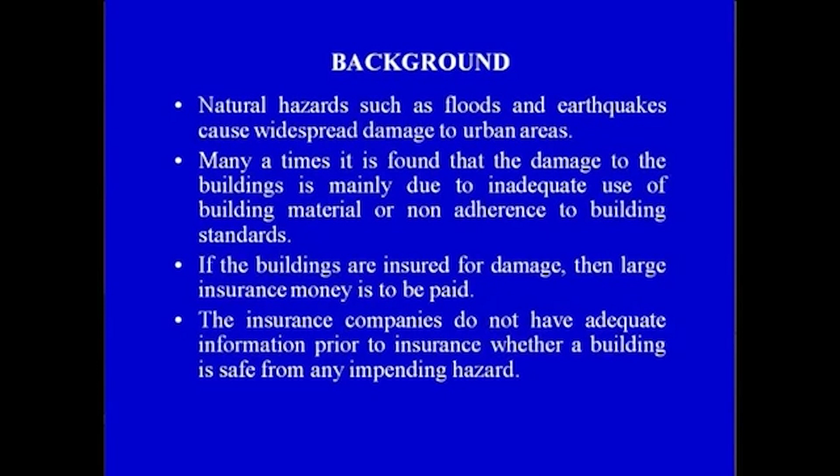The insurance companies do not have adequate information prior to insurance whether a building is safe from any impending hazard. To acquire such information regarding individual buildings through ground based methods is going to be time consuming and costly. So, this study tries to highlight the usage of advanced surveying techniques to generate a building attribute database, so that the same can be used for assessing the risk associated with each building as and when a natural hazard occurs.

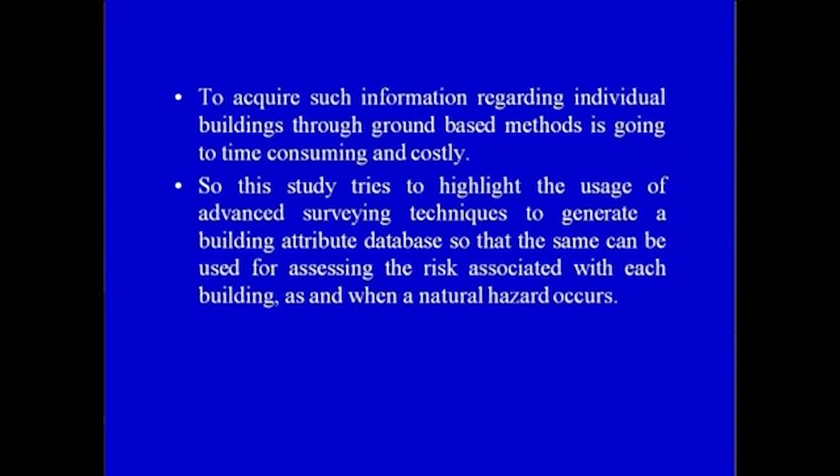So, the objective of this study is to generate the information of some of the buildings characteristics using high resolution satellite data like QuickBird and benchmarking with respect to ground based data. The study also includes generation of knowledge based rules for creating a building inventory GIS database.

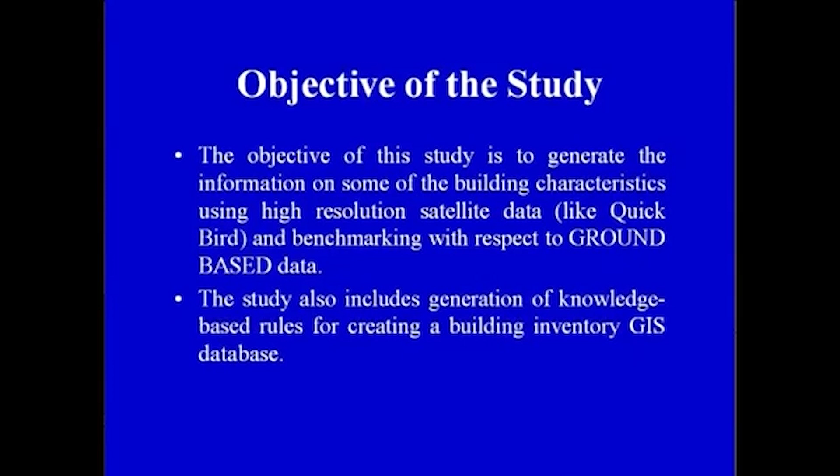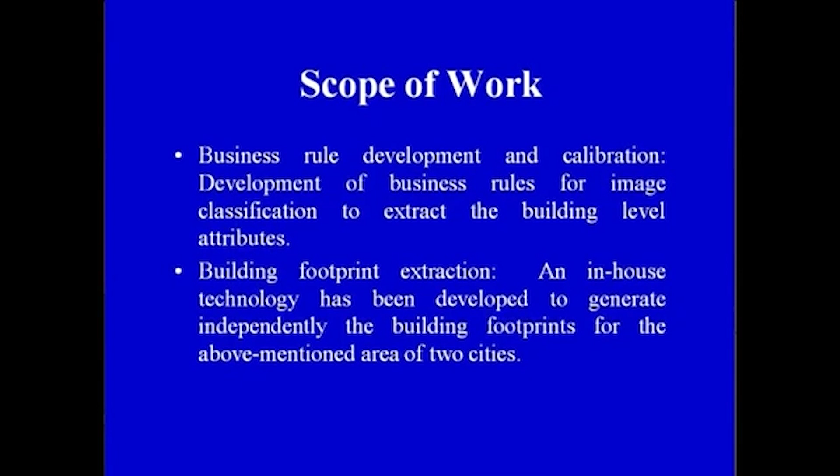The scope of the work can be defined as follows. First, business rule development and calibration: the development of business rules for image classification to extract the building level attributes. Next is building footprint extraction. An in-house technology has been developed to generate independently the building footprints for the above mentioned areas of the two cities for which the study has been implemented.

Building inventory generation. Along with building footprints, the following attributes need to be extracted, such as building height, number of stories, complete square footage, footprint square footage, construction class, occupancy type, exterior wall material, building shape, roof geometry and roof material. And finally, validation with field survey data or any secondary data, with the help of field survey data or available field photographs of some of the sample buildings.

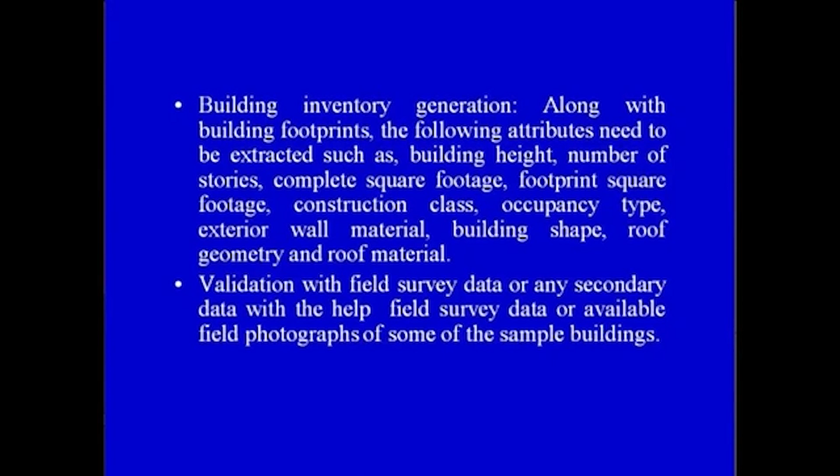There are three study areas which have been selected, namely Santa Ana, Costa Mesa in Orange County, California, and Naples in Florida in the United States of America. One site each in Santa Ana and Costa Mesa and two sites in Naples, covering an area of 1 square kilometer each, have been selected for this study.

Well, in these two areas, predominantly urban areas have been selected, so that the impact of the same can be studied, whereas in Santa Ana, areas comprising of high rise buildings have been selected, so that the information for high rise buildings can be extracted.

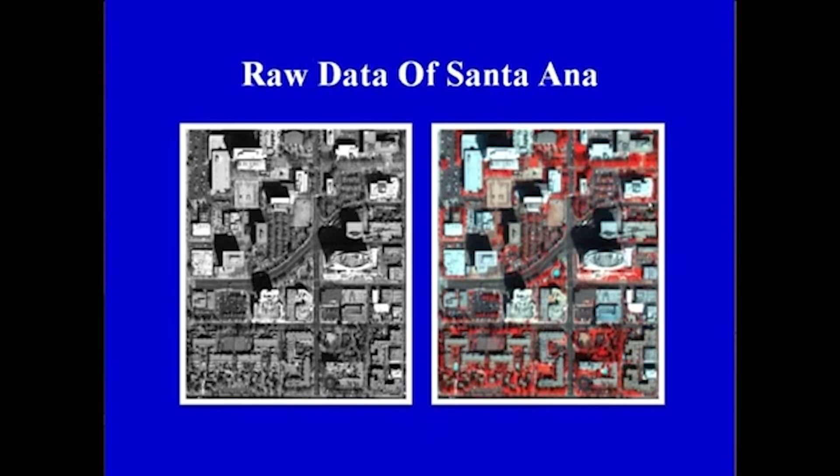Similarly, for Naples area, two sites have been selected. Naples is an area in Florida which is close to the coastal region and is very commonly used by tourists for vacation. So, here there are lot of resorts which we can see, and these resorts may be single story or they could be multiple story buildings. Another area of Naples is the commercial area, which comprises of both residential and commercial areas.

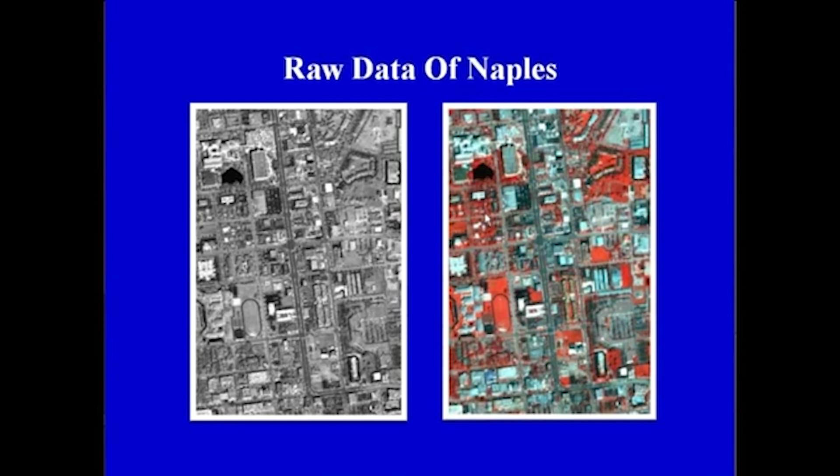So, for the generation of building footprints and its attributes, a semi automated approach has been adopted. Here pan data has been used as a single data set for extracting edges, whereas MSS QuickBird data has been used for classifying the building material. So, now let us look at the methodology which has been adopted for this study. We have two data sets. First is the panchromatic QuickBird data and the other is MSS QuickBird data.

The panchromatic QuickBird data is subjected to different forms of data extraction available through image processing, that is, density slicing and Kirsch filter have been selected to extract the information. After the data has been subjected to these processes, the edges are converted from raster to vector. The vector layers need to be cleaned and built for clarity in the information, and subsequently the data set has to be converted into shapefile before any vector based analysis in a GIS environment can be adopted. Sometimes a manual editing process may be required if the edges of the building are very wide.

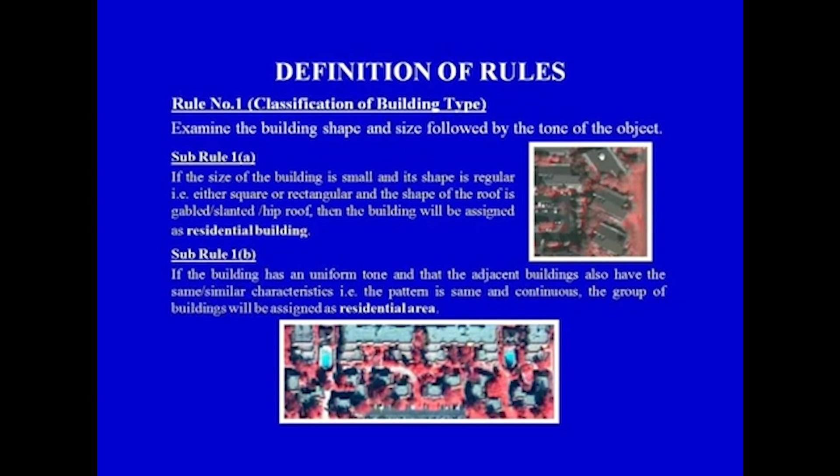Sub rule 1C: examine the nearby objects, that is the shape of the roads, location of parks. If the group of buildings occurs on both sides of the road in a regular manner, the group of buildings will be confirmed to belong to a residential category. Additionally, presence of small parks or lawns within the area will further strengthen the confirmation of the group of buildings as residential areas.

Sub rule 1D: examine the building size and shape, and if the size of the building is large and on the rooftops many utility items such as water storage tanks or air conditioning units appear, then the building may be assigned as a commercial building. It may be an office complex or a hotel or a warehouse.

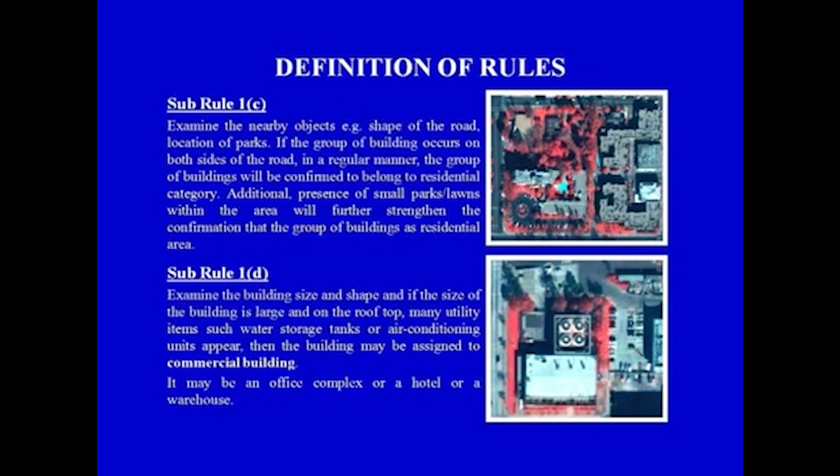Sub rule 1E: if the rooftop is flat and there is presence of underground ramps or open space for parking, having stories greater than 4, the building may be categorized as a hotel or an office building. If the front of the building has lawn space or close to it water pools exist, then the building can be classified as a hotel, or else it is an office complex.

The same can be seen here. In the center we find an elliptical shape object which is nothing but the rooftop area of a particular building, and adjoining on the right hand side, we find that there is a ramp which goes below the ground. This gives us a clear indication that this is a hotel area.

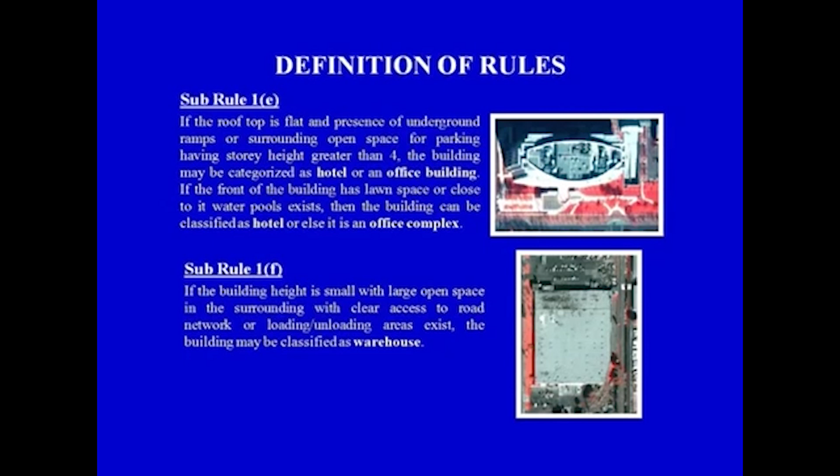Next sub rule is rule 1F: if the building height is small with large open space in the surrounding with clear access to road network or loading and unloading areas exist, the building may be classified as a warehouse. Then rule number 2: classification of rooftop building material.

Spectrally classify the building and based on the signature, tone and texture classify the building material. So, rule 2A for residential areas: if the building roof is gable, hip, gable and/or slanted, and the number of stories is less than 4, the building material used may be aluminum overlaid by tiles.

If the color of the tiles in the FCC of the satellite appears in varying tones of red, then it is earthen tiles. If the color tones in the FCC of the satellite images appear in gray, then it is shingle tiles.

Rule 2b, commercial areas. If the rooftop is flat and the size of the building is large with open spaces for parking or loading/unloading areas, and the color tone of the roof material has shades of gray, then the roof material may be classified as PVC fiber mesh with bitumen covered by concrete tiles for waterproofing. The cutout adjacent shows such an area in the satellite image.

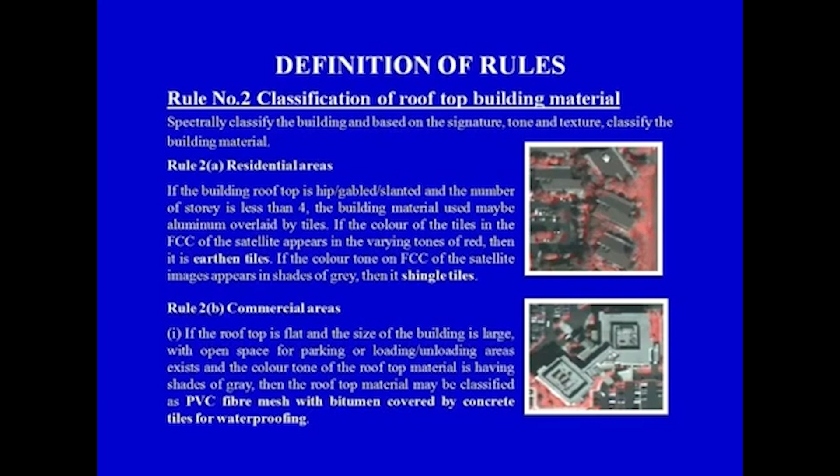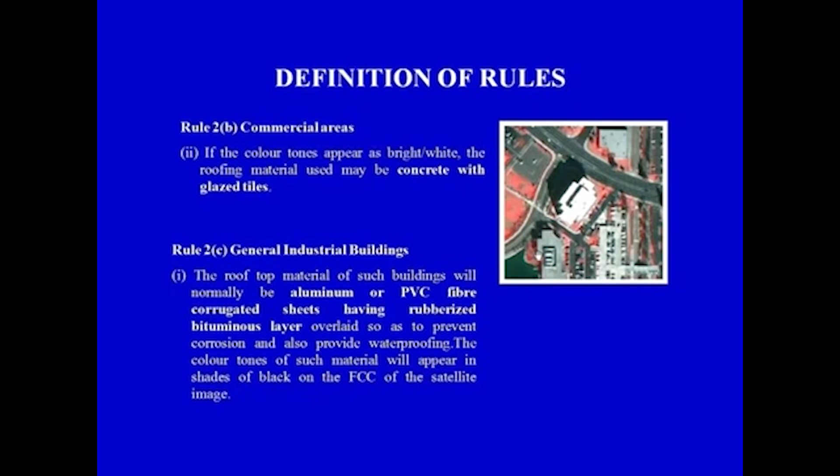Rule number 2b, commercial areas: if the color tones appear bright or white, the roofing material used may be concrete with glazed tile. Similarly, rule 2c is general industrial buildings: the rooftop material of such buildings will normally be aluminum or PVC fiber corrugated sheets having a rubberized bitumen layer overlaid to prevent corrosion and provide waterproofing. The color tones of such materials appear in shades of black on the FCC of the satellite image.

For cladding material, residential buildings will use plywood or gypsum board with a covering of paint/tiles. Warehouses will have precast concrete walls. Hotels and office buildings could have concrete/framed aluminum panels having plywood overlain with concrete or glazed glass.

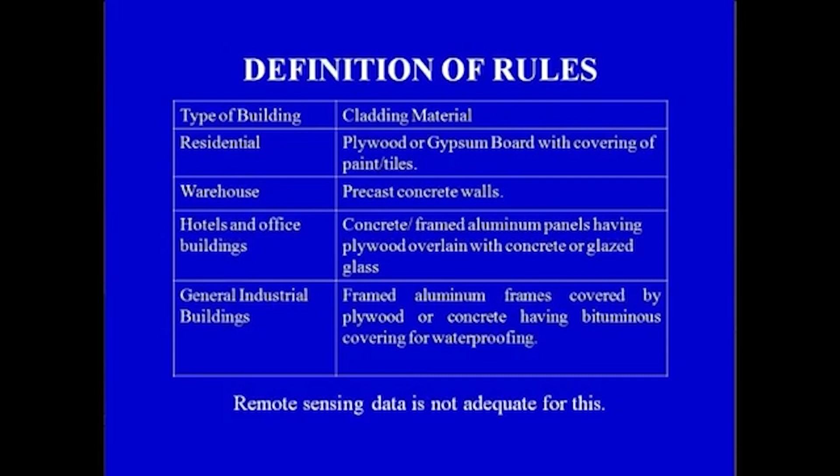And finally, for general industrial buildings, the cladding material could be framed aluminum covered by plywood or concrete having bituminous covering for waterproofing. It has been observed that remote sensing data is not adequate for this type of data extraction. Having defined the decision making rules, now we start with the actual analysis procedure.

First procedure is density slicing. First, the image is visually interpreted to understand the shape and size of the buildings. After this, density slicing is carried out. This gives the ability to highlight a range of pixel values in the lookup table. It is one of the common and reliable methods of finding the optimum threshold value and is done by manual selection. On the basis of visual examination, a threshold value ranging between 500 to 700 is applied. This may be applied repeatedly till the buildings are sharply seen with respect to the background.

So, the procedure for density slicing is: click on the Modeler option on the main menu bar of ERDAS Imagine, click Spatial Modeler, select the Model Maker and apply the conditions for the model as shown in this slide. The condition has been applied in the model maker, and on this basis the analysis is carried out, which yields the result now seen.

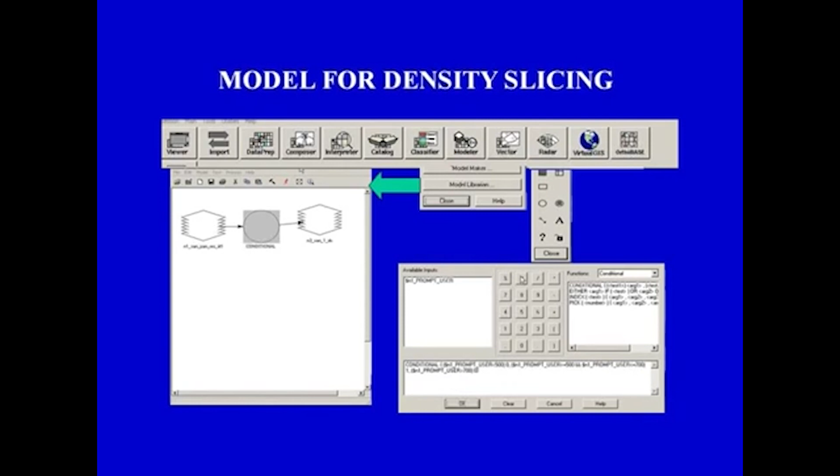Having created the raster based information, it has to be converted into a shapefile. This involves cleaning the data, building up the vector topology, and conversion from coverage to shapefiles. Even after this, the polygons may not be smooth, so we may have to do some manual editing. So, let us look at the procedure of converting the raster information into vector information.

In the ERDAS Imagine software, we click the option on the main bar, select Vector Utilities, click on the raster to vector option, click on the clean vector layer option, click on the build vector layer topology option, and finally import the information through the available module. Based on this, we have now been able to convert the coverage information into vector information in the form of continuous lines.

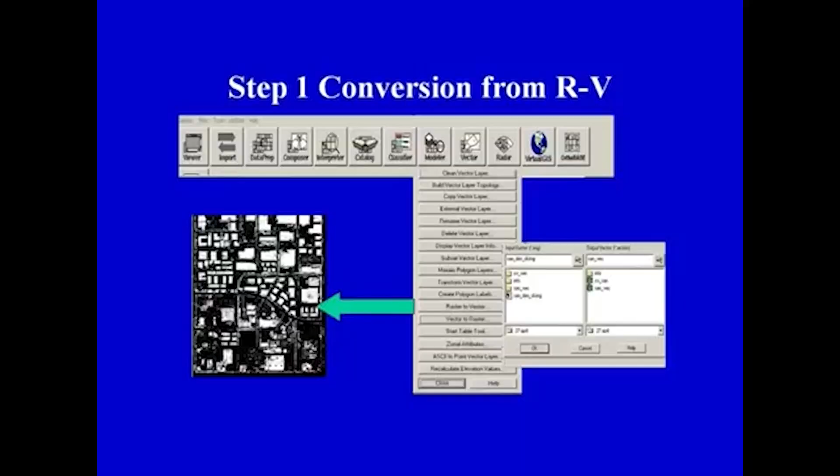Having done this, we need to do the cleaning and building up of the vector topology through the process highlighted here. Since editing is not possible in coverage files, conversion from coverage to shapefile is required. For this conversion, we go to the import/export option, select the required file, choose the shapefile generating option and create the data set.

So, after performing the density slicing with building edges, these are now in vector form. Earlier we only had the outlines, but now we have the edges in the form of vector lines.

In order to extract the information which is there, this information would be primarily in the form of edges, and these edges need not necessarily have a specific orientation. So, we undertake the process of filtering, spatial filtering, wherein the Kirsch filter has been selected in this particular study. This operator is equally sensitive to edges in all the 4 directions, that is 8 orientations.

It gives negative weights to each 5 consecutive neighbors and positive weights to 3 of the weights chosen, so that they all sum up to 0. The central pixel can be given a 0 weight. This may be applied on a repeated basis till the buildings are sharply seen with respect to the background. Again, we convert from raster to vector, clean the vector file and convert it into a shape file.

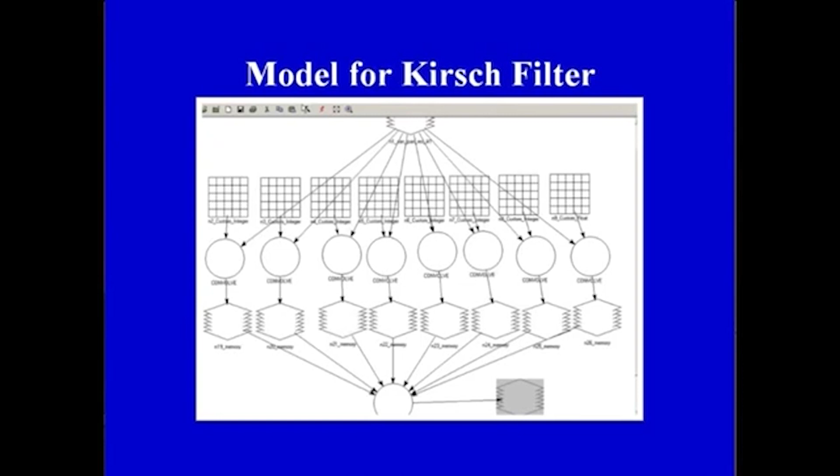So, these slides show the model for the Kirsch filter. We have 8 models which are available to us, and on the basis of this, we apply the conditional rule to undertake the sorting of the edges which can be built from the Kirsch filter. And after applying the Kirsch filter, now what we find is that the edges of different objects have now been extracted very simply from the data set.

It may be observed that some of the polygons may have a certain amount of thickness. So, we may need to reduce these thicknesses by a procedure, wherein we again apply the Kirsch filter and then we manually join both these informations to get the additional building polygons, which can be merged together to provide a complete building footprint data set.

So, now what we have done is we have thinned the edges and we had the polygons already available through the shape file, and these have been merged together, and what we see is the highlighted areas of the building. Now, in this case, you may notice that the roads which were earlier also appearing as outlines of the edges have now been eliminated. So, the roads and walls in the area are now not going to be present, only the building shape files are going to be available to us.

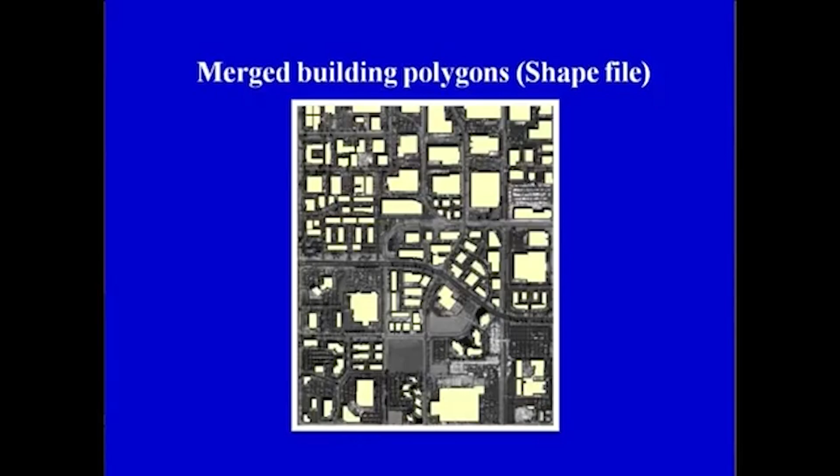Having done the extraction of edges, our next part is to perform the unsupervised classification. In order to take advantage of the high spatial resolution offered by PAN data, first of all, we merge the PAN and the FCC of the multispectral data, so that this transforms the original satellite data into new bands that express the greatest amount of variance or information from the feature set of the original bands.

So, here one can see that the PAN image and the FCC image have now been merged together, and the image on the rightmost side is the merged image that we have, and this image is now going to be subjected to unsupervised classification.

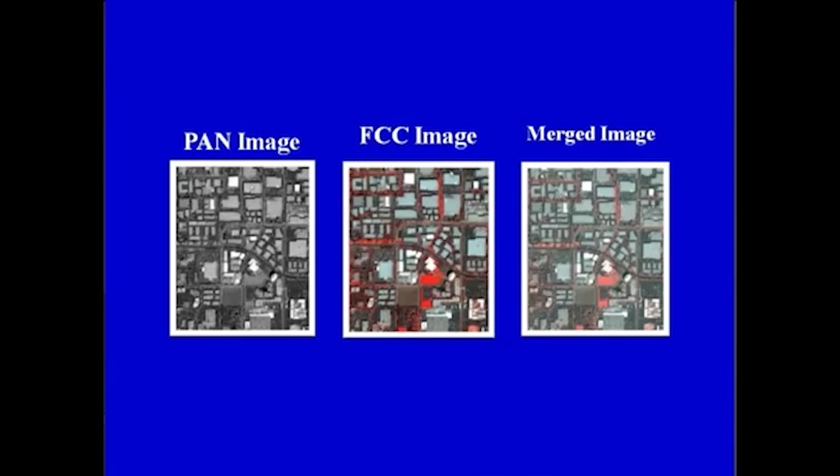In order to perform unsupervised classification, ERDAS provides an option of ISODATA. In this we need to specify the number of iterations and the number of classes, and these have been kept as 25 and 10 respectively. With the help of this classification, the roof material will be identified.

So, in ERDAS Imagine, we select classifier and go in for classification, click on unsupervised, provide our input data, and based on this, it creates the spectrally similar information which is present on the shape files that we have generated. So, one can see very clearly the type of information extracted in this particular image.

Interesting to note that by and large all the building rooftop materials have similar properties. However, there are some buildings which are dissimilar, and these can be seen in the red color. So, for classification of the rooftop building material, we spectrally classify the building, and based on the signature, tone and texture we classify the building material.

If the color tone appears as white or bright, the roofing material used may be concrete roof with glazed tiles. If the rooftop material is having shades of gray, then it may be classified as PVC fiber mesh with bitumen covered by concrete tiles for waterproofing.

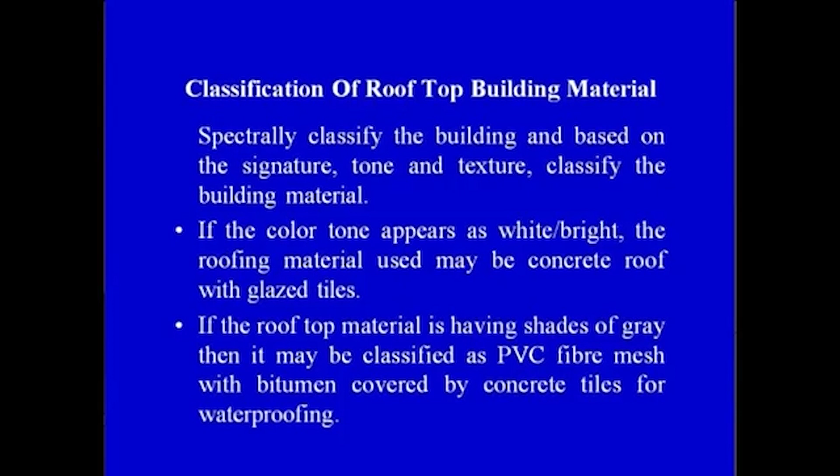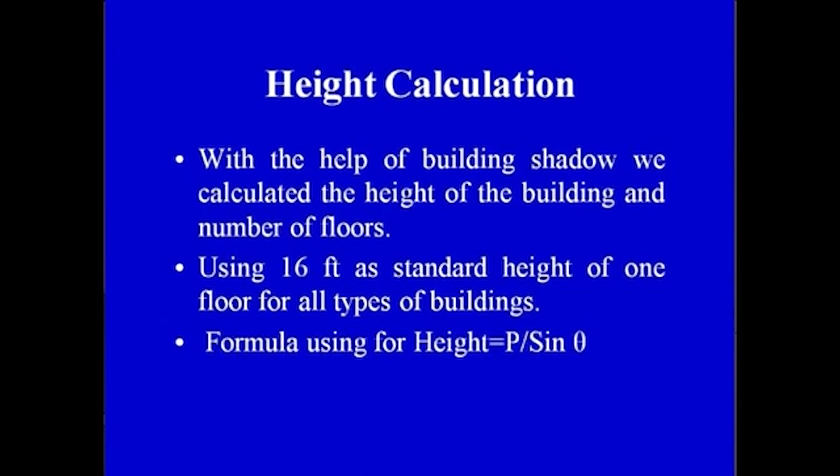Having extracted the roof type material, our next step is the computation of the height. With the help of the building shadow, we can calculate the height of the building and the number of floors. Using 16 feet as the standard height of one floor for all buildings, the formula can be used as height is equal to P divided by sin theta. So, this slide provides us the basis of the height calculation.

One thing the viewer may note is that in order to find out the height of the building, we need to correctly identify the topmost point and the bottommost point. But the bottommost point, since it is lying in the shadow area, may not always be visible very clearly. So, instead of using the sine rule, the tan rule has been used by taking into consideration the slant height, and thus the building height can be obtained.

Having done this, our next task is to generate the GIS database. Some of the typical parameters of the database are building ID, class of building, shape of building, construction, footage area, height of the building, number of stories, occupancy, roof type material, roof type itself, and the cladding material.

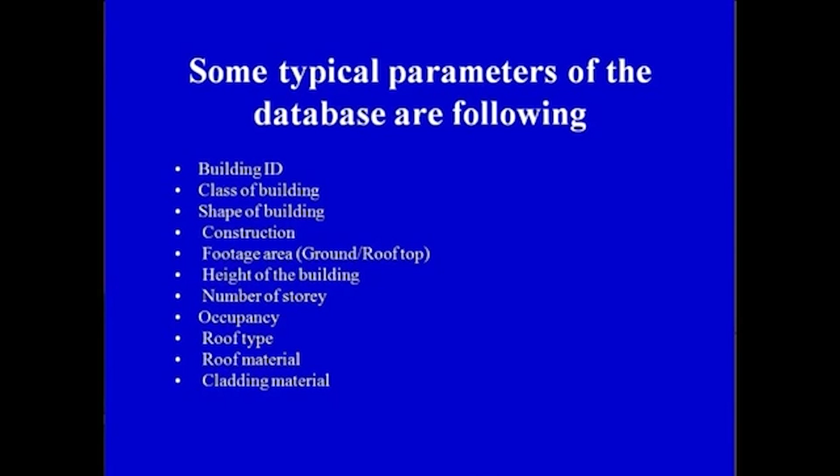In order to create the database, we first click the attribute file and open the attribute table. We then select the option add fields, so that the user defined fields can be entered or created, and after this we get the shape file. So, here within the GIS framework, we have opened the attribute file for the corresponding data set. We select the different fields which are required to identify the various characteristics.

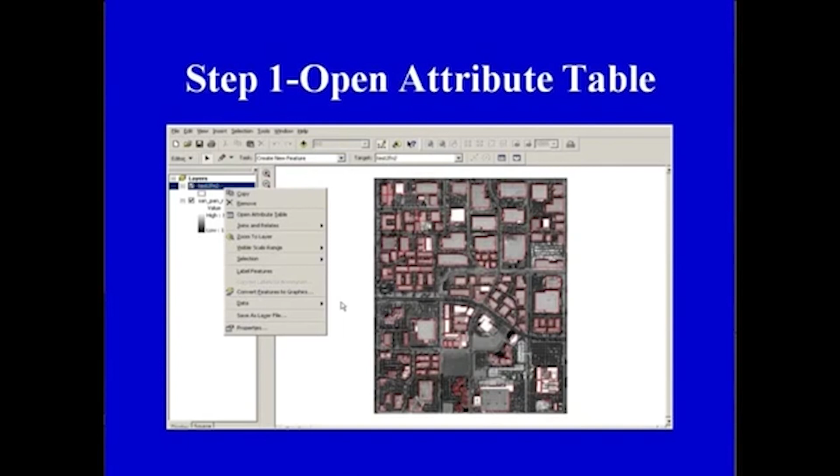So, we can see that we have the building ID, then the number of stories, configuration of the building, that is the shape, or we can enter the rooftop material, and so on. The various fields can be added for different attributes. Having done this, we add the attributes to the data set, and an attribute table corresponding to this may appear in this manner.

Based on this, we create the attribute table for the ground data set, and then we can merge the information or run the software to find out the type of area which has been identified both from the satellite and from the ground, and compute the percentage error. By and large, it has been observed that the percentage error varies between minus 5% and 1.2%, which as a matter of fact is not a very significant deviation.

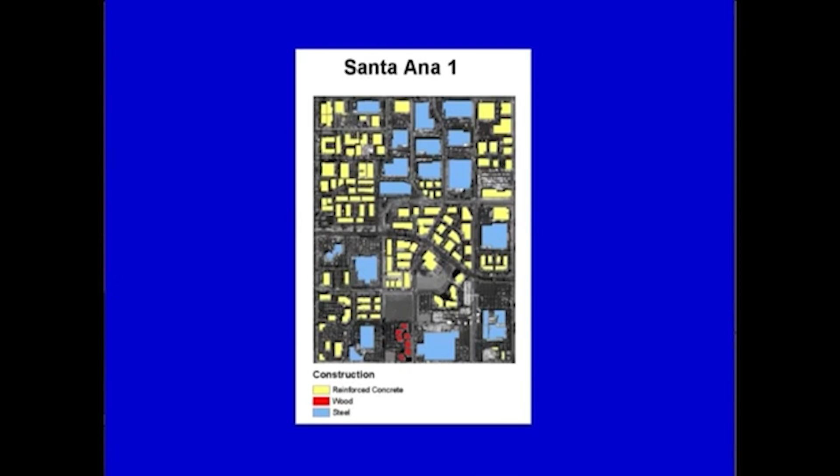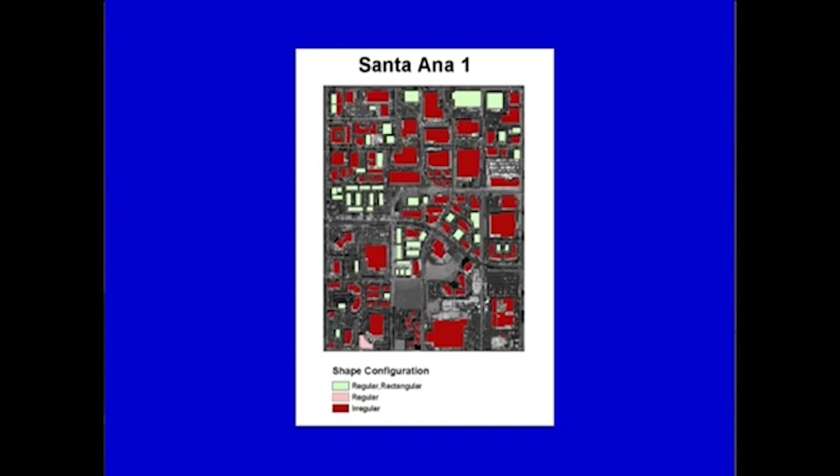Having done this particular task, we are now able to identify the different types of building attributes, and using this information we can create the database. Viewers, you will be able to appreciate that the information extracted from the satellite data is of a very varied type, and this highlights the utility of using such advanced surveying techniques to create different theme based maps.

With this application, I come to the end of this particular course material on advanced surveying techniques.